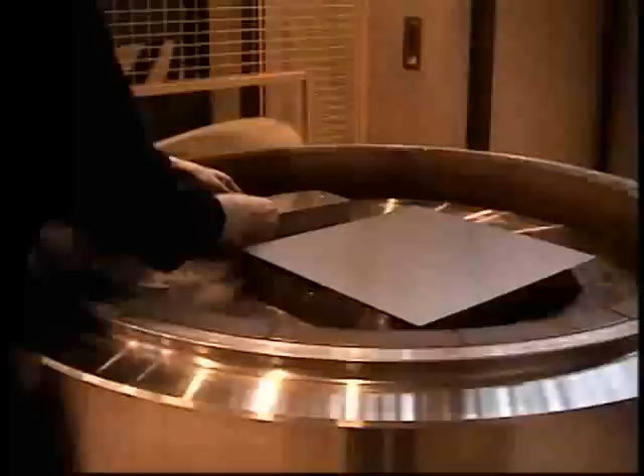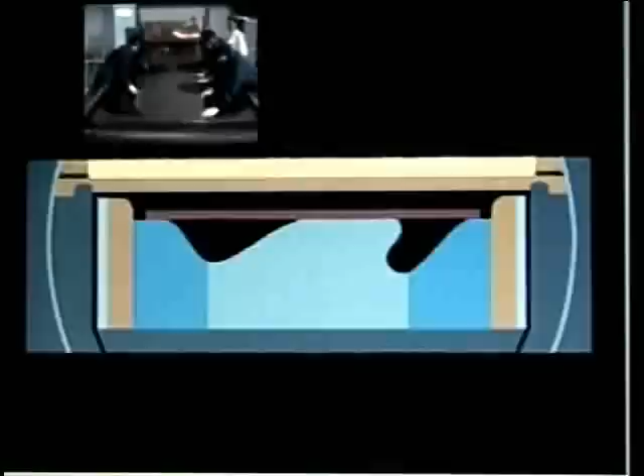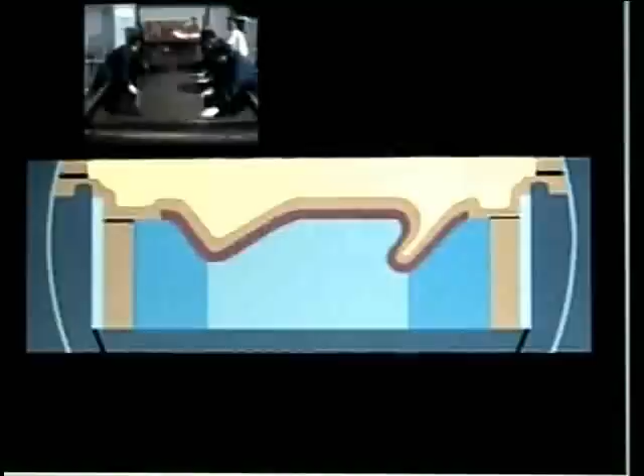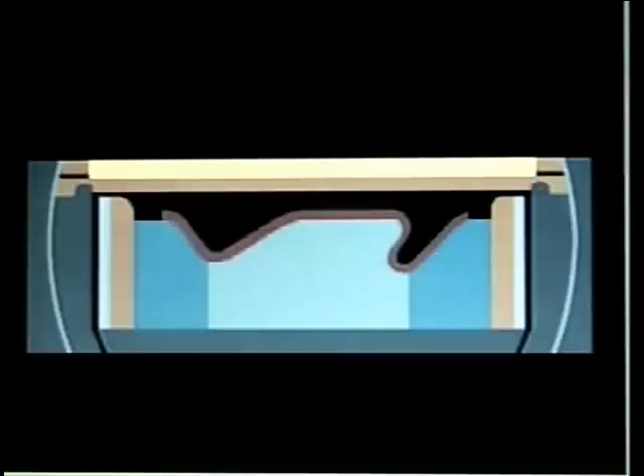Flex forming is a basically simple concept. A sheet metal blank is placed over a single shape-defining tool half. The upper tool half is a flexible rubber diaphragm which is pressurized by pumping in oil. As pressure increases, the diaphragm forms the blank uniformly around and into the tool. When the set pressure is reached, the oil is decompressed and pumped out of the press. The diaphragm returns to its rest position, formed parts are removed, and new blanks are loaded for another cycle.

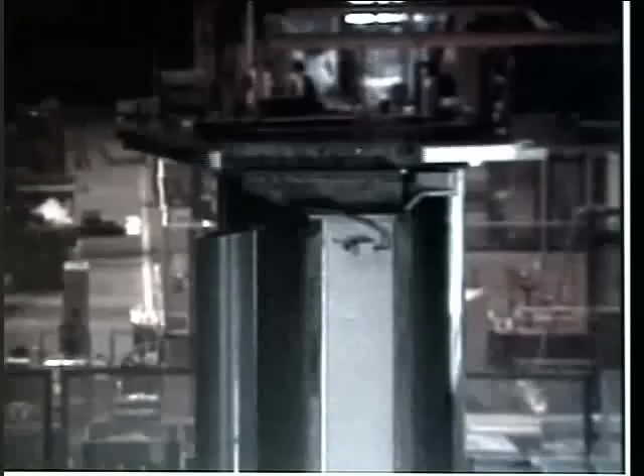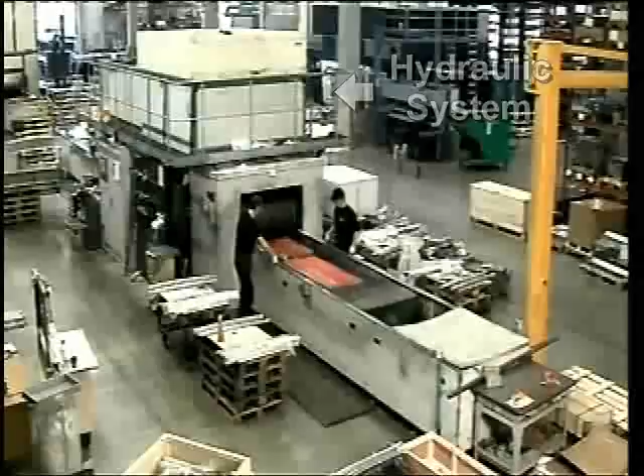Now let's take a closer look at the FlexForm press. The press frame is a horizontally positioned cylinder, reinforced with pre-stressed wire winding to safely contain the high hydrostatic pressure. The hydraulic system is typically housed above the press to conserve floor space. Tools and blanks are loaded into large forming trays on tables that shuttle in and out of the press. Parts are placed in the tray with no need for fine alignment or fixing in place.

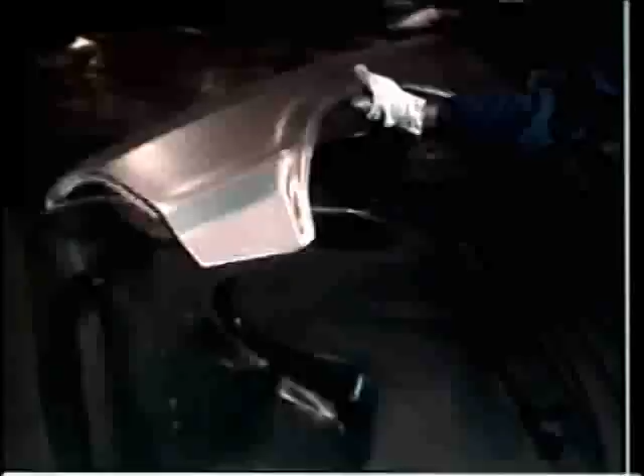Fluid cell forming has proven to have a number of economic and processing advantages, particularly when compared to rubber pad pressing and mechanical or hydraulic stamping.

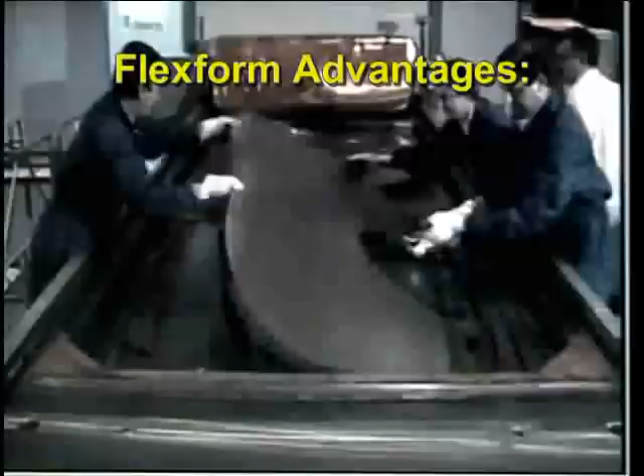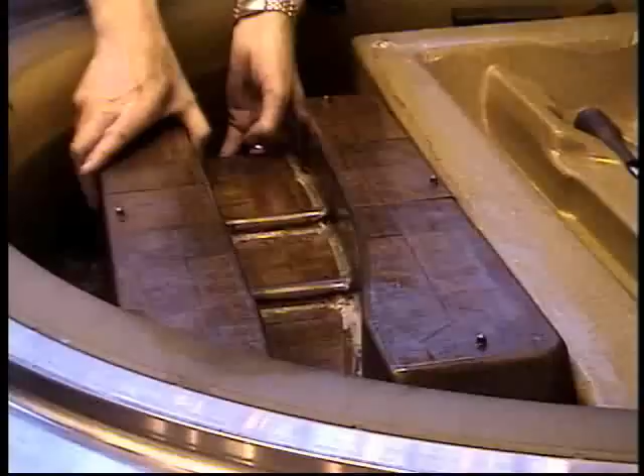Unlike the 2- or 3-piece tool sets used in stamping presses, Flexform requires only a single shape-defining punch or die, cutting tool costs by 50 to 90%. Tool matching and alignment procedures are eliminated, and with the uniformly applied pressure, stresses in the tool are almost purely compressional, permitting the use of inexpensive, lower strength, easy-to-machine materials such as hardwood and plastic.

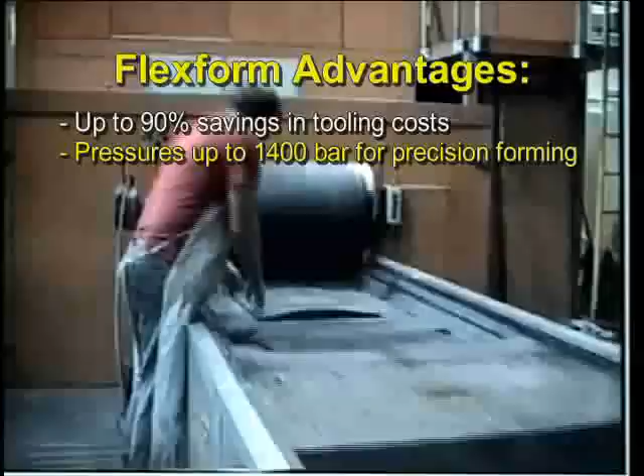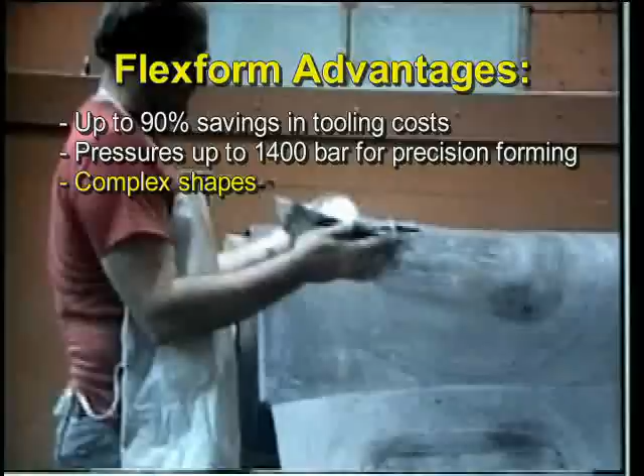Very high pressures up to 1400 bar or 20,000 psi form parts to precise tolerances with little or no manual correction. Intricate shapes, including undercuts and holes, can be produced, often in one operation. Tools can incorporate cutting edges to eliminate downstream trimming. Multiple parts can be processed in a single cycle.

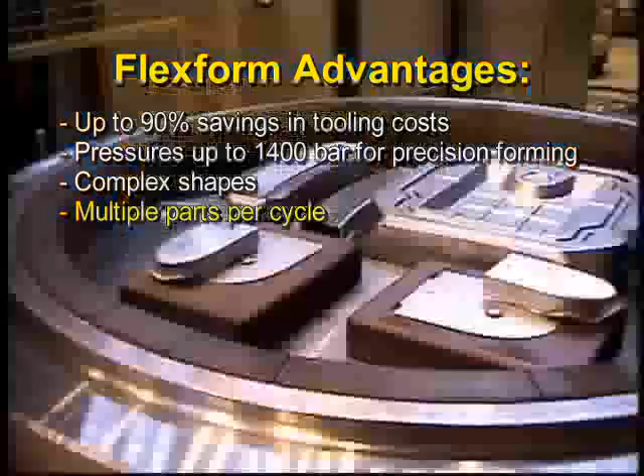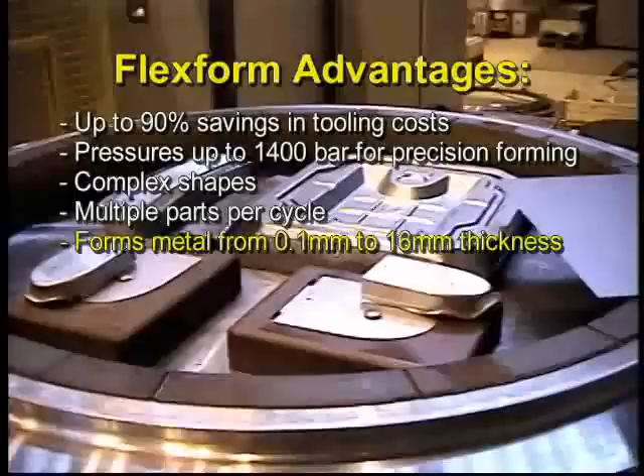Virtually any sheet metal from 1/10 of a millimeter to more than 16 millimeters, 0.004 to 0.63 inches, can be formed. Different gauges can be formed on the same tool. Surface finishes are free from scratches or gall marks.

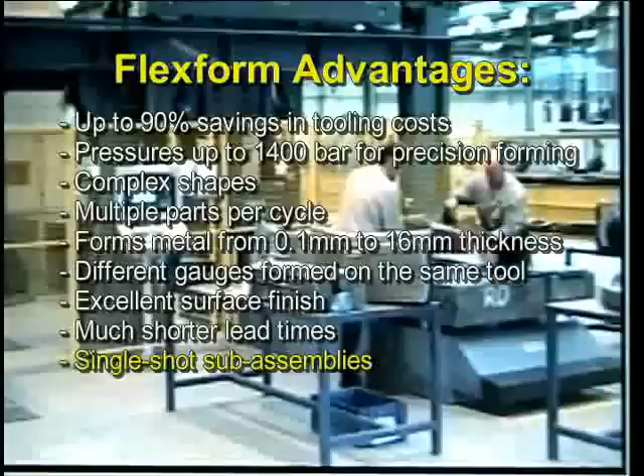Lead times are dramatically shortened for both prototypes and production parts. Complex parts can be designed and produced that would be prohibitively expensive with conventional presses. Large, intricate parts can be formed, allowing designers to combine smaller components into single seamless units, saving downstream assembly time and the extra weight of welds and fasteners.

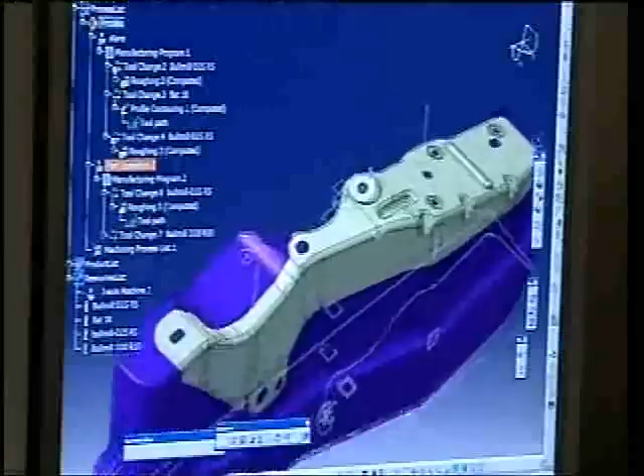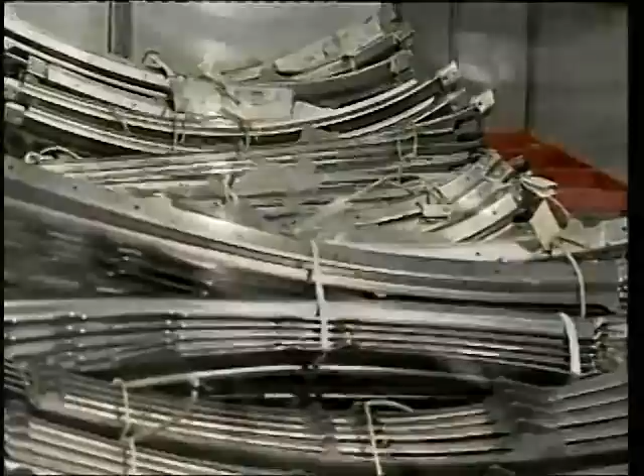Cost efficiency is paramount in the globally competitive aerospace and automotive industries, and Avure has responded with advancements in product design and forming technology. Today, a variety of press sizes and capabilities are available to conform to the specific operational and volume requirements of both OEMs and their contract suppliers. Avure offers FlexForm presses in 3 basic styles.

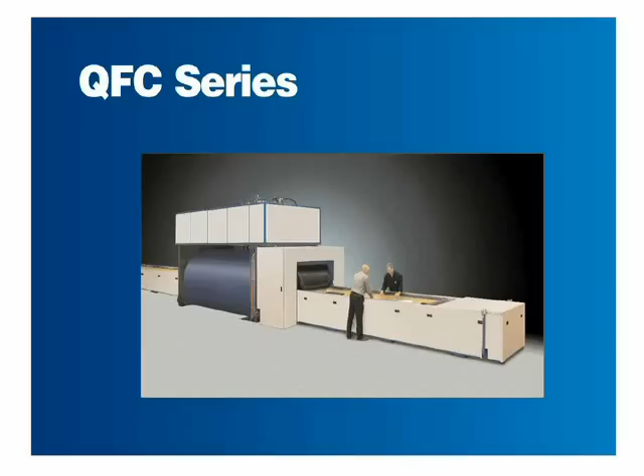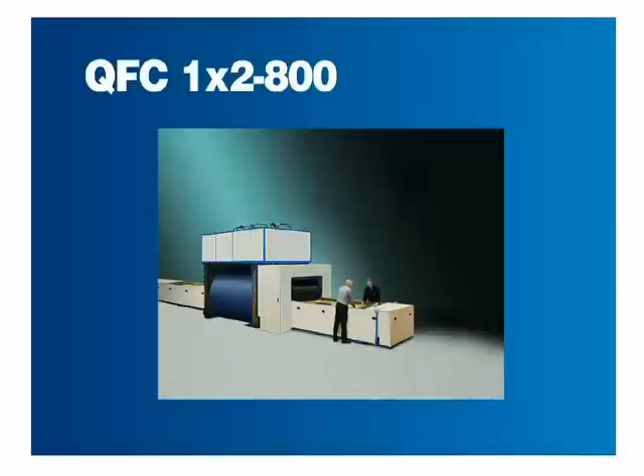QFC presses have the largest forming capacity, with dual rectangular trays up to 8 square meters that can form parts well over 4 meters in length. Standard maximum pressures are 1,000 and 1,400 bar. Recently, an intermediate-sized QFC press has been introduced with a 1 by 2 meter tray and 800 bar maximum pressure.

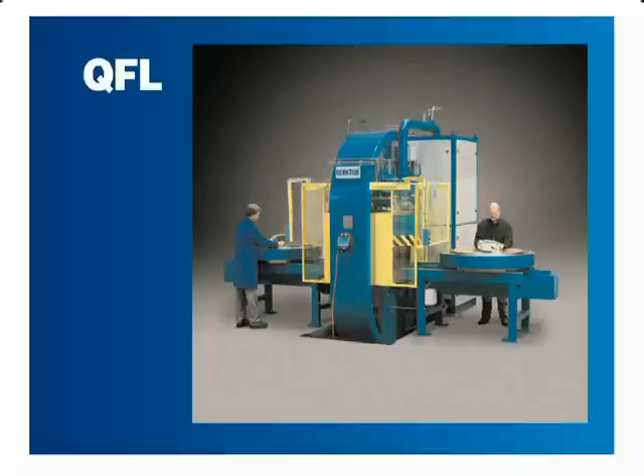QFL presses are compact units with 1 meter diameter circular trays, designed for faster forming of smaller parts. Cycles average about 1 minute, with maximum pressure of 800 bar.

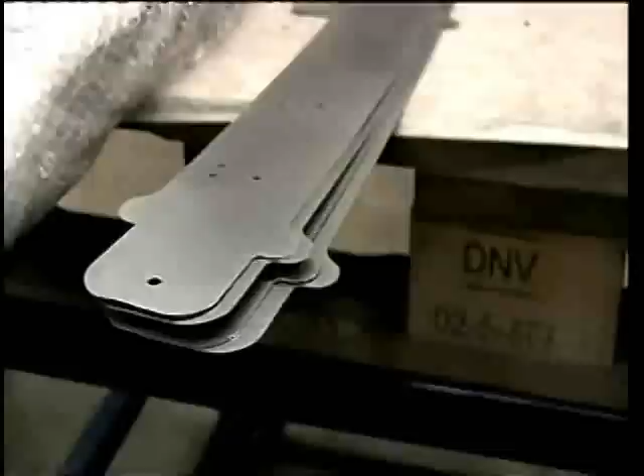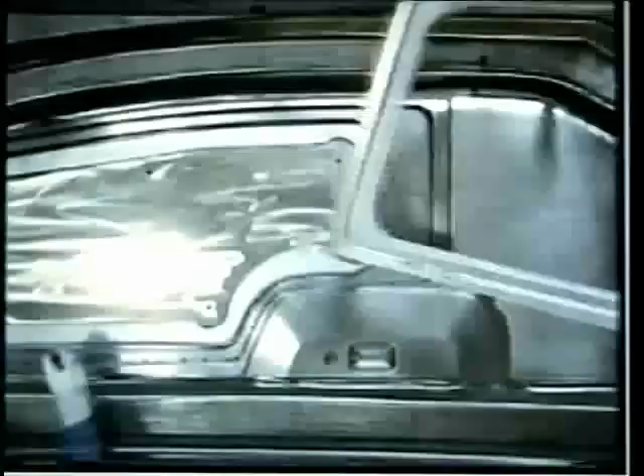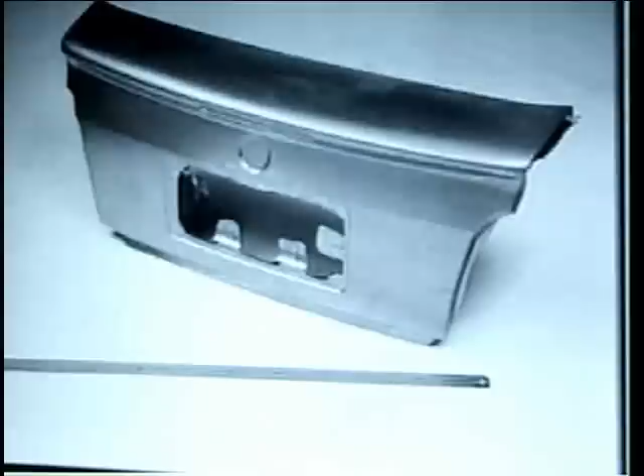Any part configuration that can be manufactured on conventional rigid tools can be produced by Flexform presses. These include single and compound curves, contoured parts with stretch or shrink flanges, shallow recesses, and deep-drawn parts. Designs can incorporate forming features such as internal and external beads, lightening and access holes with or without flanges, and joggles to provide space for adjoining parts.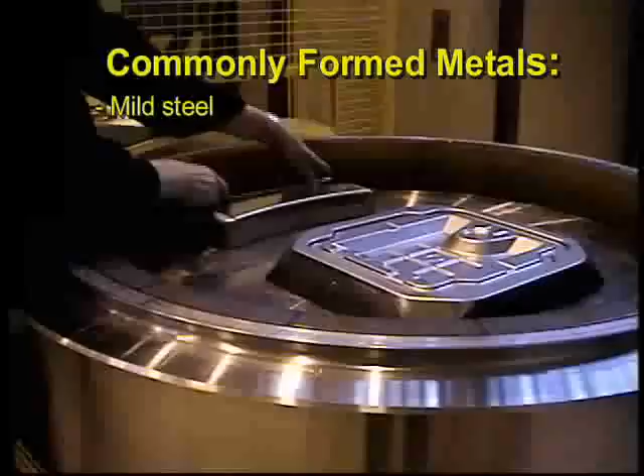The sheet metals most commonly formed on the fluid cell press are mild steel, high-strength steel and aluminum alloys, stainless steel, and titanium. Other materials can include nickel-based alloys such as Hastelloy, Inconel, and Nimonic 75.

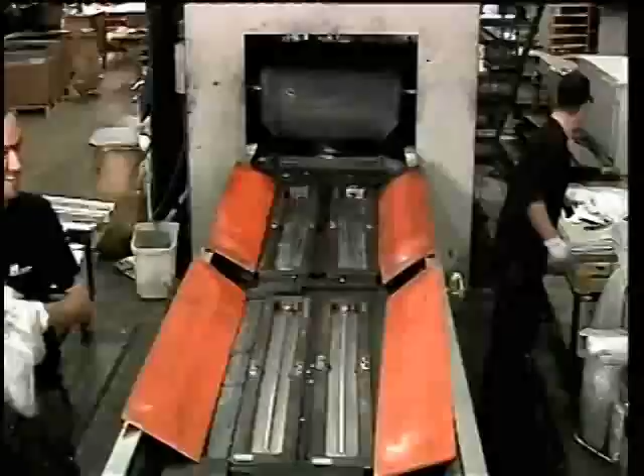Single-piece tooling is the primary reason for the growing adoption of flex forming among sheet metal parts fabricators. There are 4 basic types of fluid cell tools. The punch or male die is the simplest, least expensive, and most widely used type of fluid cell tool, having the same shape as the internal surface of the pressing.

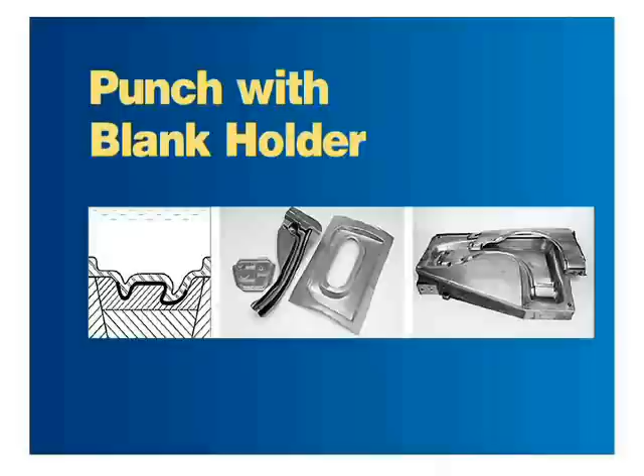The punch can be augmented with a blank holder that supports the entire unstressed area of the blank. This reduces the risk of drawing too much of the sheet metal into the forming area, which may result in wrinkling. The die, or cavity die or female die, consists of a central cavity surrounded by a flat or curved section upon which the blank rests, thus eliminating the need for a separate blank holder. The surface of the die produces the external surface of the pressed part.

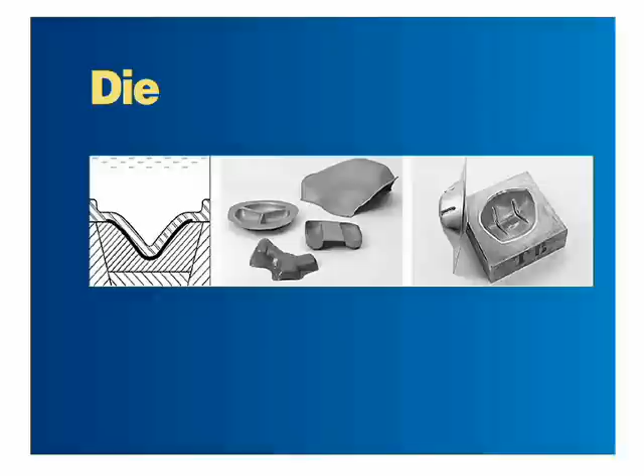An expansion die is used when the blank is to be pressed radially outwards into undercuts in the cavity. The die is made in 2 or more pieces and is pulled apart after the pressing cycle to allow removal of the parts.

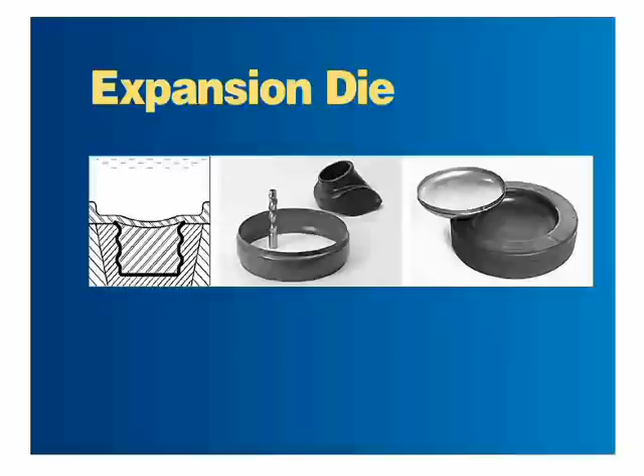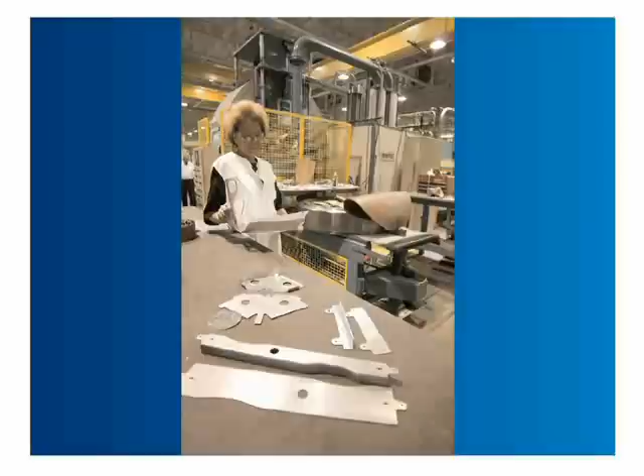Because cycle times range from 1 to 3 minutes, fluid cell pressing has not been considered to be a mass production technique. That being said, many companies use Flexform presses to supply the great majority of their sheet metal parts, taking advantage of unique processing features.

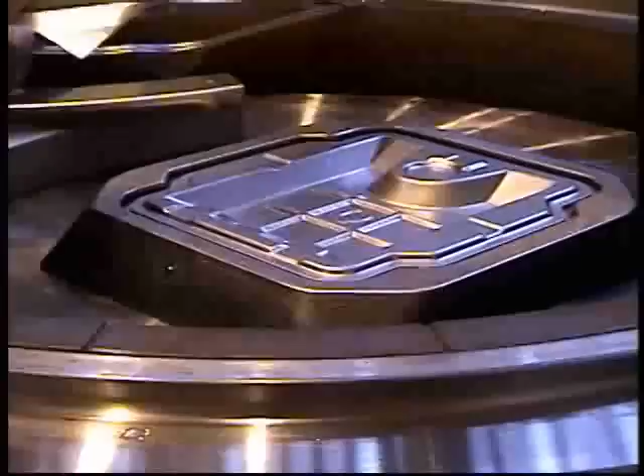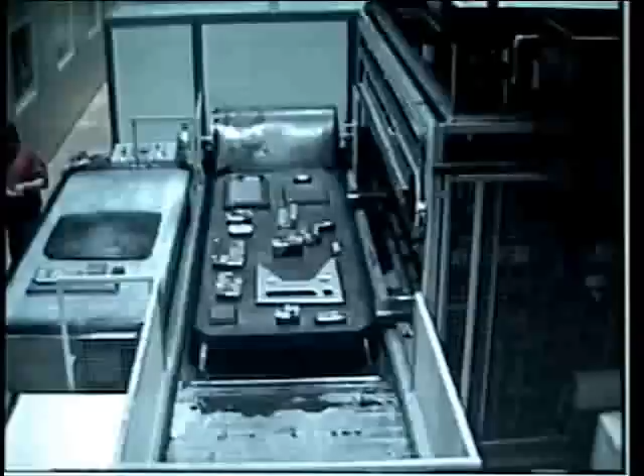Many parts can be formed in a single cycle. The dual tray system results in very short setup times, an important consideration with batch sizes that require frequent tool changes. Current tool designs produce a high percentage of finished, trimmed parts directly off the press, with no downstream rework. Quick cycle presses like the QFL can produce up to 120 finished parts per hour. Automated pallet systems preloaded with tools and blanks are available to cut handling time between cycles.

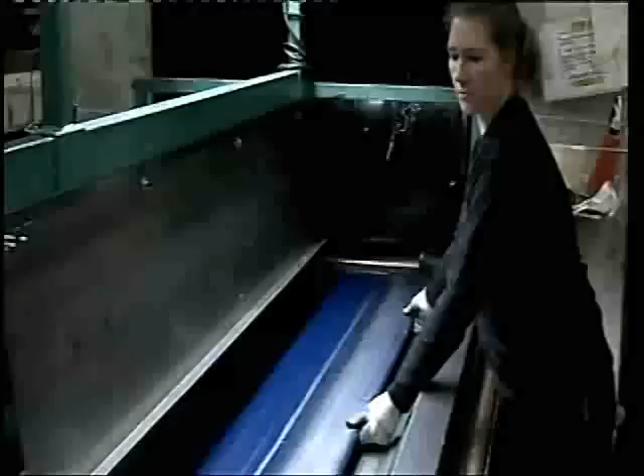Today, nearly 140 Flexform presses are in operation worldwide. Some have been performing successfully for more than 30 years, and a few have achieved or are approaching 1 million cycles.

Discover what leading manufacturers already know about the advantages of high-pressure sheet metal forming from Avure Technologies.